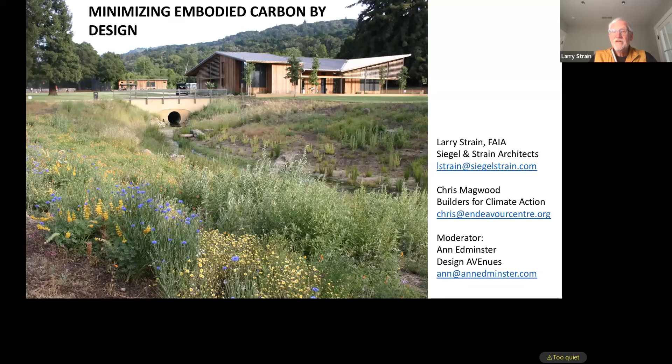So this is kind of what the day is going to look like: what it is, why it's important, embodied emissions from buildings, and the time value of carbon emissions, reducing embodied carbon using standard materials and methods, which is a case study that I'll be sharing. Then Chris has got a whole pre-recorded segment on carbon storing and carbon sequestering materials. After that, I'm going to close by talking about the importance of existing buildings in this whole discussion about embodied carbon and a little bit on tools that are available.

Starting with definitions: first of all, when we talk about carbon in this slideshow, we're talking about all greenhouse gases. We probably already know that, but it's all the methane, carbon, CO2, everything. It's all just a shorthand for talking about that.

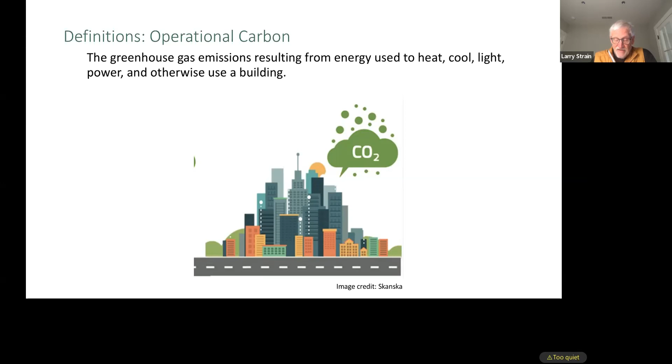Operating emissions are all the greenhouse gas emissions from operating a building, and it includes direct emissions from on-site fossil fuel combustion at the building and indirect emissions from the electricity used to power the buildings. These emissions are ongoing and cumulative over time.

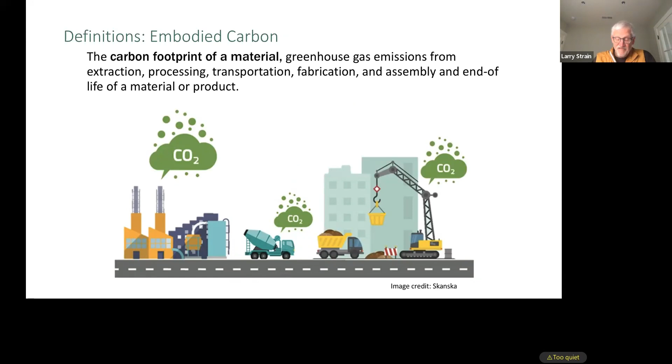Embodied emissions are the carbon footprint of a material, the greenhouse gas from extracting, processing, and transporting it. It typically represents a huge hit of carbon emissions at the beginning of a building's life, but it also includes emissions from maintenance and repairs over time. Embodied carbon doesn't have to be emissions, it could also be stored or sequestered.

Avoided carbon, which we'll talk about too, is about the savings from a particular choice. For instance, renovating and upgrading a building compared to tearing it down and rebuilding it, or building with carbon sequestering materials compared to building with materials that generate carbon emissions.

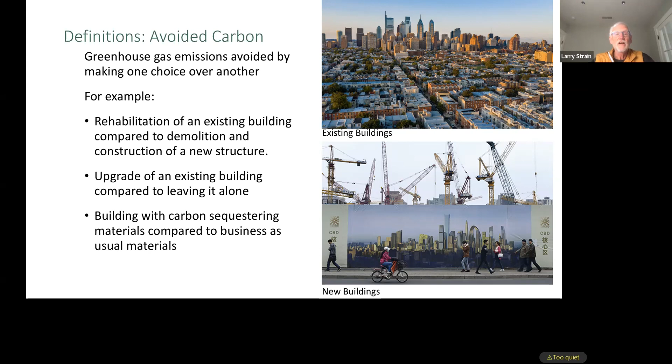You've probably seen this chart before, many of you have. Buildings make up about 40% of global emissions. 28% is from operating all the buildings we already have, and 11% is the embodied emissions from buildings. The point I like to make is that operations is mostly existing, embodied emissions are mostly new, although it does include renovations of existing buildings, but most of the emissions are coming from building new buildings.

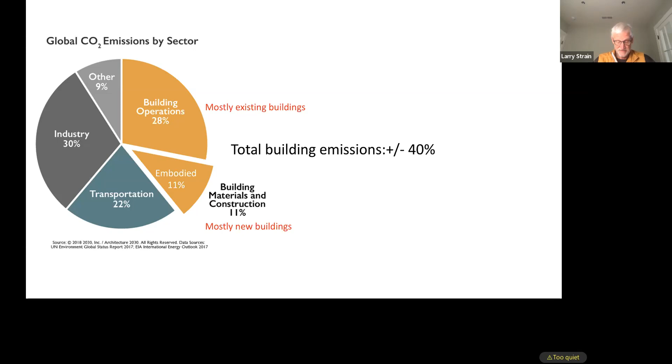The majority of embodied emissions happen when the building is built. What this means is for the buildings we build between now and 2030, if we continue to build the way we currently build, about 80% of their carbon footprint will be embodied. So for new buildings, over the next critical 10 years, reducing embodied emissions is key. To tackle operating emissions, we need to make new buildings net zero, but even more importantly, we need to reduce the operating emissions from existing buildings, and we'll get to that later.

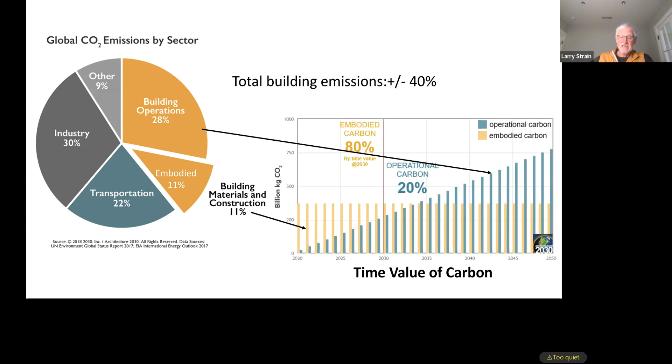The majority of embodied emissions typically are from the materials we build with. They make up 70 to 85%. The rest are emissions directly associated with construction, the site work and utilities required for the project. Many embodied carbon studies leave out these other emissions, and many aren't even counting all the materials. Some only include structural materials. These percentages will vary by project. Sometimes site work or transport can be significant, but the bottom line is most embodied emissions are currently from the materials we build with.

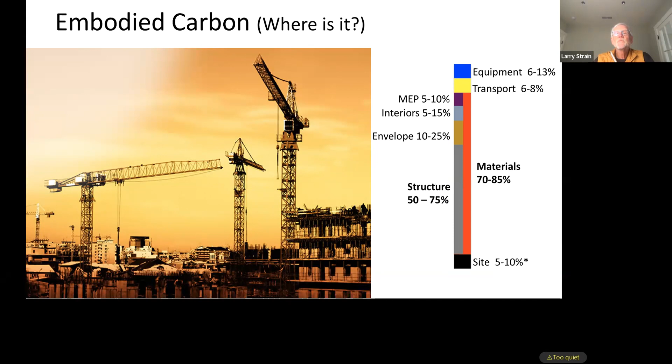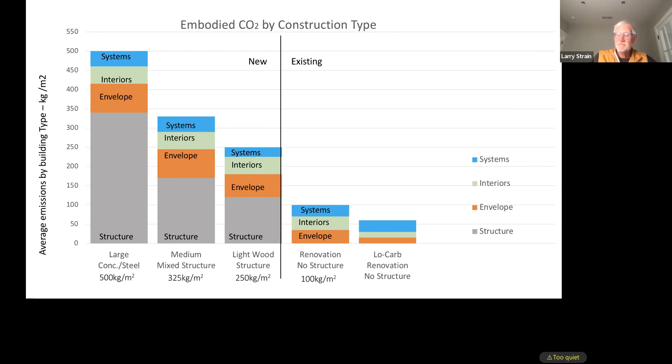So our firm knew about the importance of embodied carbon since, as Anne mentioned, the early 90s. But at first we just focused on reducing the carbon footprint of concrete because we knew how important it was. We didn't know much about the embodied emissions from all the rest of the materials. The first project we tried this on was the Portola Valley Town Center, a LEED Platinum, really efficient project built with a conscious effort to use low impact, low carbon materials.

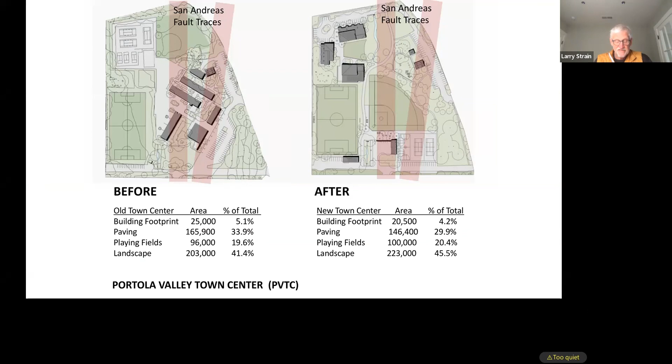The existing buildings on the left were deconstructed and the materials were reused in a new town center just outside the fault zone. We were also able to reduce the building footprint and paved areas and increase the landscape and playing fields. We had a very involved community and a lot of input from the community on the project throughout, which was really helpful.

Restoration was an important part of the project. We introduced a lot of native planting and habitat. This is a portion of the creek that we uncovered, and it forms the fourth side of the town green. The community hall is in the background.

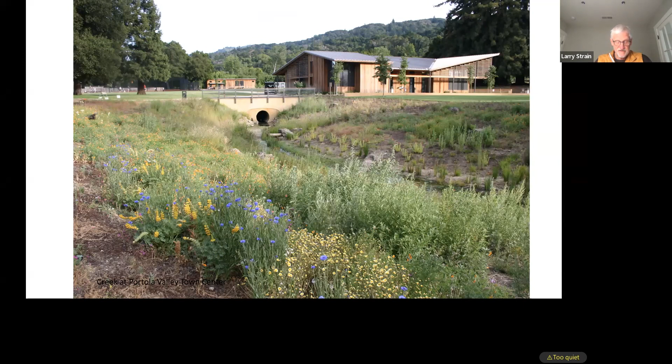After it was completed, we decided to try and measure all of the carbon emissions from building the project, the embodied CO2. This was before there were tools like Tally available, so the first thing you had to do to calculate the carbon footprint was figure out how much everything weighed.

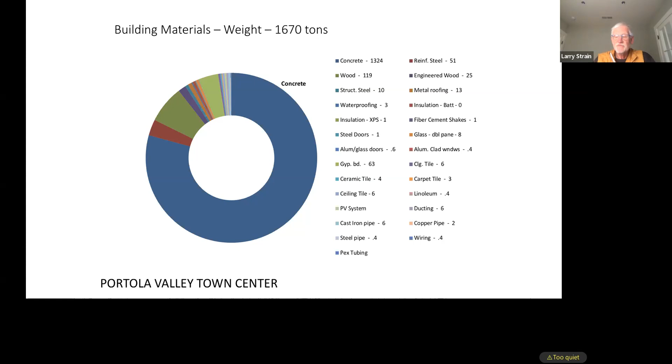You can see that the concrete foundations and slabs accounted for most of the weight, about 80% of the weight of these buildings was concrete. This is even though these were wood frame buildings, clad in wood, with wood paneling, wood ceilings, and some wood flooring.

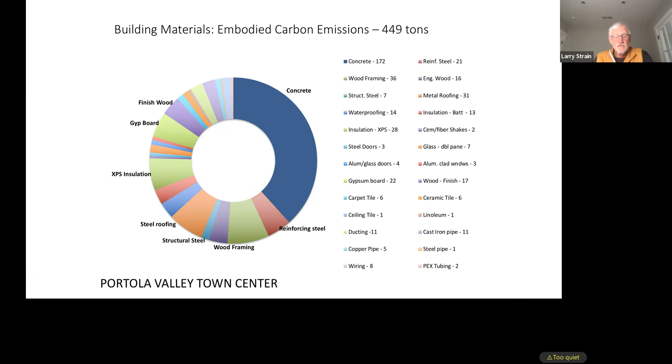Wood was about 12%, steel a little over 13%, even though by weight we used half as much steel as we did wood. The new framing lumber was all FSC certified, and most of the rest of it was reclaimed. We didn't count sequestration for the new lumber, which would have lowered our wood number significantly.

So then we modeled a base case project using standard material choices, which are the orange bars on this chart, and compared it to the materials we actually used, which are the blue bars. Concrete not only accounted for the largest portion of emissions, on the far left there,

it was also where we realized the largest savings, about an 80-ton reduction from using a high slag, high fly ash concrete mix. The other interesting thing we learned was that we saved about 40 tons by using the salvaged wood.

It shows up here as a negative number on this chart because, A, the salvaged wood is not going to landfill and decomposing and turning into methane, and B, because the trees we didn't have to cut down are still growing, sequestering carbon. The overall reduction was a little over 30%.

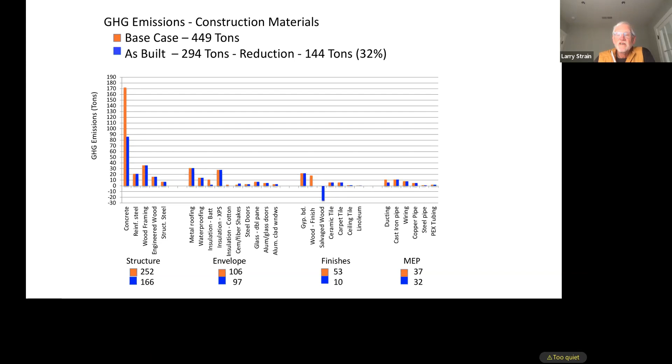And this was really mostly from those two sources, from concrete and reclaimed wood. There are other ones where we saved a little bit here and there, but you can see down at the bottom, the reductions in each category, and the largest one is in structure. But finishes, which includes the wood, was also pretty large.

This is the multi-purpose room in the community hall and the reading room in the library. Almost all the wood was salvaged from the old school buildings, remilled and used on the ceilings and walls. The floor in the multi-purpose room is eucalyptus from trees that were cleared for fire safety reasons and milled and dried within a few miles of the site.

Everybody got on board with the salvaged wood. The town, because it recalled the old school buildings, which they had loved, and the contractor also really got into it. When he realized we were running out of salvaged wood from the old school, he took the wood crates that the metal roofing came in and remilled it and used it for window trim without even asking us. He just went ahead and did it, which we thought was great.

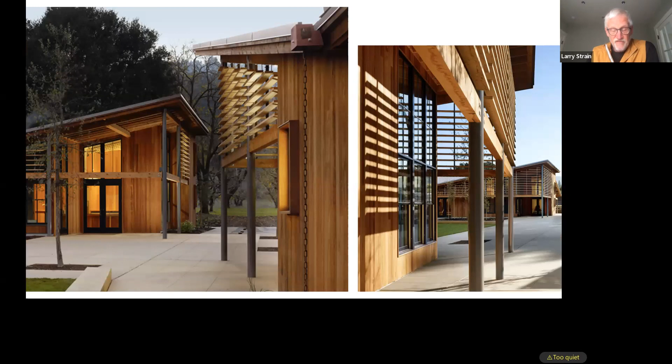All of the exterior siding is salvaged redwood from Northern California, a nod to the many tall redwoods growing on the site. The sunshades are salvaged yellow cedar, chosen because it weathers to a silvery gray, which better bounces light into the buildings. The beams supporting the sunshades were also salvaged from the old school buildings.

So, how do the embodied emissions compare with the operating emissions for this project? As usual, for operating, we started with a passive approach: maximize natural ventilation and daylighting, minimize heat gain with shading, use thermal mass for nighttime cooling, and we modeled all this with our engineers to optimize our choices.

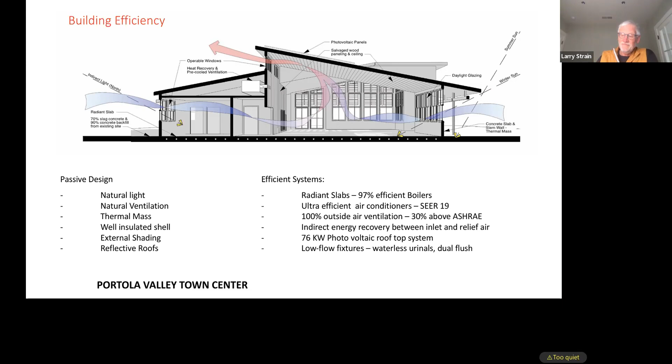After we had done all that, we were in the position to use small, very efficient mechanical systems, which saved both first cost and operating costs. The buildings use about half as much energy as a building designed to California Title 24, and most of that was supplied by on-site PVs.

Embodied carbon, embodied CO2, is usually counted as so many years worth of operating CO2. And over the projected 100-year lifespan of these buildings, even accounting for increases due to repairs and maintenance, the embodied emissions for the as-built project were about 13% of the projected operating emissions, which wasn't very significant.

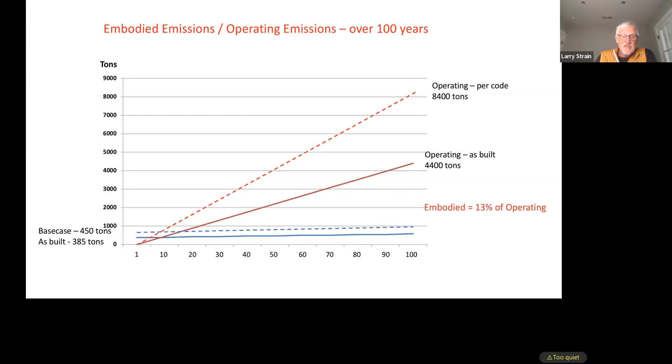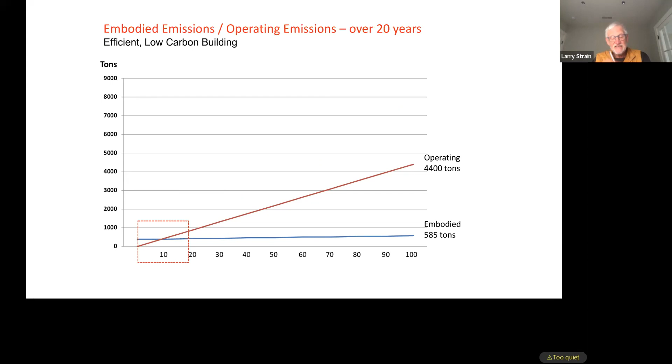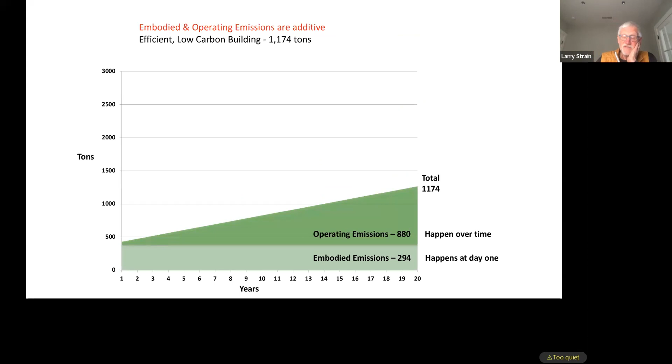There are also ways to reduce embodied carbon even more, which Chris is going to talk about. And now, I hope, through the wonders of technology, we're going to hear from a pre-recorded Chris to tell us about more radical ways of approaching embodied carbon emissions.

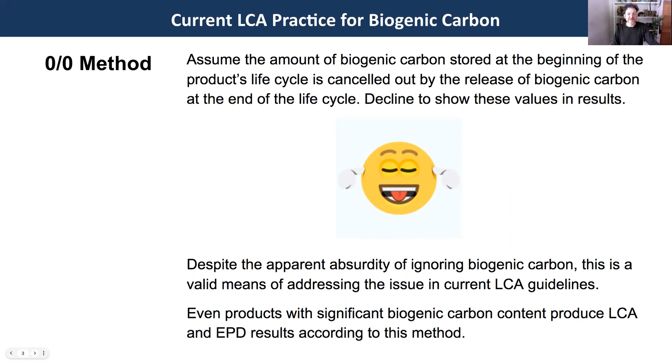The -1+1 method is somewhat similar in that you count the carbon that was pulled out of the atmosphere and is stored in the material at the front. So in the A1 harvesting section of an LCA, you say if there's 20 kilograms of carbon stored in this material that came out of the atmosphere, there's a -20, like 20 came out of the atmosphere. Then at the end of the life cycle, you say that 20 came back out here.

Or you can say, well, not all of that 20 came out at the end. We're going to say that X amount of the material goes to landfill, and therefore this much carbon comes out, or this much gets incinerated, and so this much carbon comes out. Essentially, you're using the minus and the plus to come up with a figure for the end of life, and it usually ends up being a positive number, showing that the material still has sometimes a significant carbon footprint, even though it has this large amount of carbon stored in it.

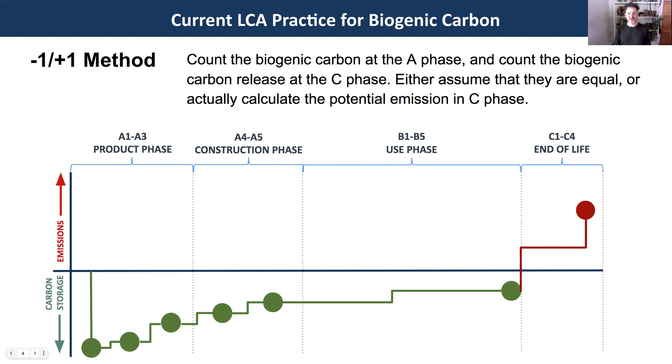This seems like it should be a good way to do this, but it highlights a really critical issue with LCA practice as it's done right now, which is that it ignores the importance of time in thinking about emissions and carbon storage.

We tend to fixate on the final number for a material when we're looking at LCA. We add up all the minuses and all the positives, and we get to this number at the end of life that's the total of all of those things. That single factor tends to be what we use for making comparisons between materials.

So if we use the -1+1 method but only pay attention to the end result, we miss a whole lot. Here's a map of a biogenic material: there's a big drawdown in the A stage when the material is growing, when those plants are photosynthesizing CO2 out of the atmosphere. Then that green line rises as it's harvested, transported, produced, built, maintained, fixed, and then finally the building is taken down or the material is taken out and something happens to it at the end of its life. So there's your trace of a -1+1 accounting for a biogenic material.

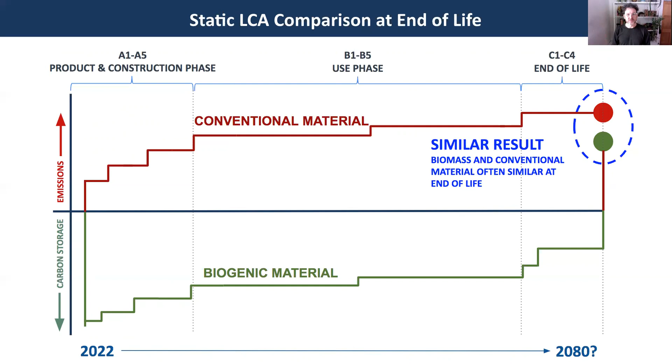What happens if we're fixated on that end-of-life result only is that those two materials don't look very different. You go, oh, the biogenic material is this percent or that percent less impactful than the conventional one, but it's not so much. So if it costs more, or if there's any other impediment to using it, it often just gets written out of the design because it's not making that big a difference. So what we need to be thinking about in life cycle assessment is the dynamics of time, and what it means to think about emissions as they occur and what happens when they occur.

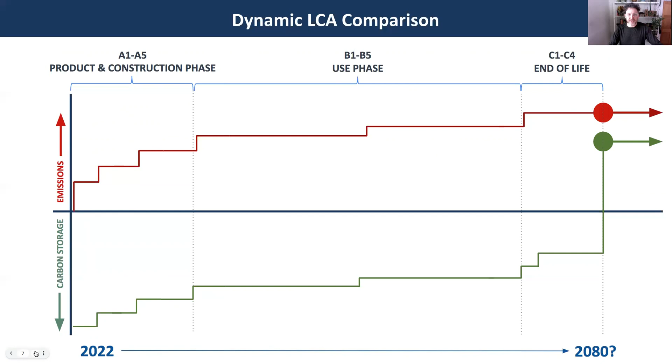When you take carbon out of the atmosphere and put it into a building material that lasts a reasonably long time, measured in decades or hopefully a century or two, it's not the little green dot at the end that tells us the impact that material has had on the atmosphere and climate. It's the area under that zero line.

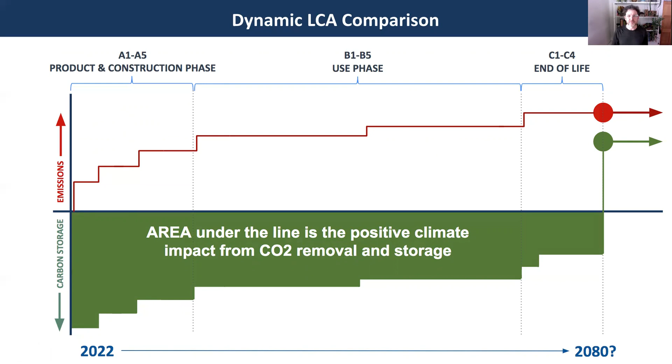Alternatively, we have to think about the area above the line as the warming impact from emissions of a material with net emissions. Again, it's not just the number at the end acting like a running total—it's the area. Every time this line jumps, those emissions enter the atmosphere and stay there, continuing to drive climate change and make the planet warmer.

It's not like emissions happen and go away—they happen and accumulate. This initial burst of emissions is still in the atmosphere. There's some decline over a century or two, but it stays in the atmosphere and drives warming. So it's that area above the line that represents the ongoing climate warming impact from those emissions.

If you add up the area below the line and the area above it, you get a very different picture of the climate impact of two material choices, rather than just looking at the final result of an end-of-life stage LCA. I think people in the LCA world are realizing we don't fix the climate by fixating on a single number representing a material at 60, 80, or 100 years. When emissions enter the atmosphere, or carbon comes out of it, there's an immediate impact that traces over time.

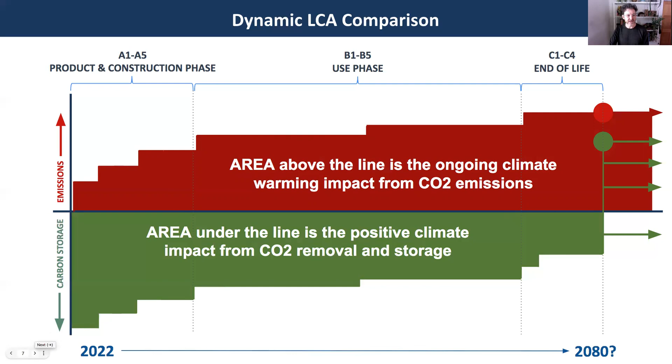But I think there's a reasonably good chance we'll do better with these materials. If we're reusing a lot of the carbon in biogenic material from a building, or turning it into biochar, carbon storage could actually continue for a longer period—possibly indefinitely. That's another thing to consider when looking at LCA results.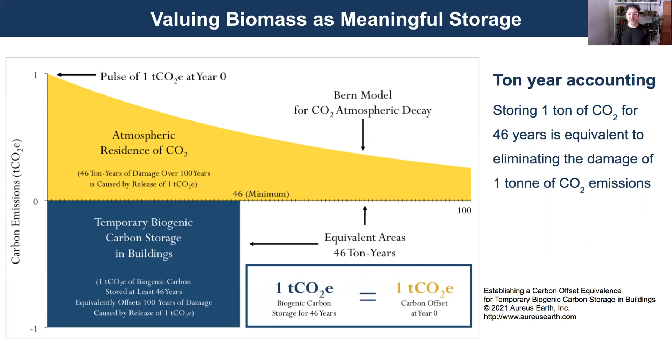If we can keep the carbon in the building longer than 46 years, it's doing more work than just 1 ton, and I'll show you that on the next slide. What we're trying to point out is that climate science understands the value of time. LCA practice hasn't necessarily understood the value of time, but if we were thinking about time the way climate scientists think about time and carbon storage, then putting carbon in buildings for 50-odd years is really meaningful - it's a 100% offset of the same amount of carbon that you've stored.

So you can come up with figures to scale the value of carbon storage based on this. If you store 100 tons of carbon in a building for just 1 year, it's the equivalent of 2.17 tons of carbon offset, and so on - you can multiply it out. At the 46-year time window, storing 100 tons offsets 100 tons. But if it goes longer, say to 80 years, your 100 tons of carbon storage has actually done the work of offsetting 174 tons, et cetera.

As the time increases - the time you've kept that CO2 out of the atmosphere - the positive impact increases as well. What this also means is that when the carbon comes out of a building, if it comes out after the 46-50 year window, whatever gets emitted is essentially a new emission. It's not a continuation of the old emission - it did its work, it completely offset a ton of carbon, and whatever portion comes out, you could consider it a new emission and deal with it separately, because it's negated itself by being out of commission for those 46 years.

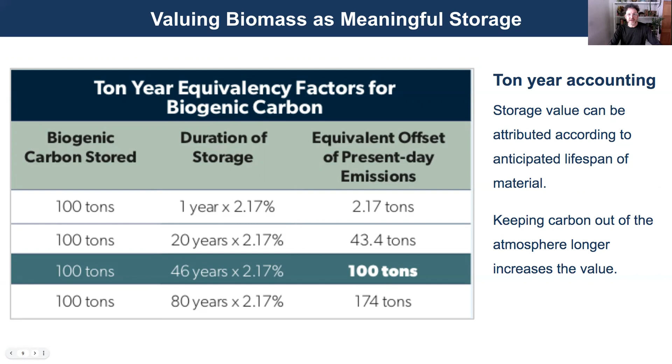So I hope that's a good enough framing that we can start to think about why biomass, why biogenic building materials have this value that perhaps hasn't been well understood or applied in building and LCA practice. Now, forests and timber products are way more difficult to assess this way, because right now the way we account for timber products and the emissions and carbon they store is looking through a pretty narrow window, and it may not be capturing everything that's critical to understand.

Looking at current LCA practice, right now for timber products, the rules are that if your wood product is coming from a sustainably managed forest - and the ISO standard says FSC or SFI in North America are considered examples of that - then you can count your carbon in the -1 +1 sort of way.

Now, what's weird about that is that neither the Forest Stewardship Council nor the Sustainable Forestry Initiative, nor to the best of my knowledge any forestry program, actually tracks carbon as part of the certification. So we're applying this notion that well, they must be doing a pretty good job, so we'll just credit them for doing a good job for something that they're not really doing on the wood side.

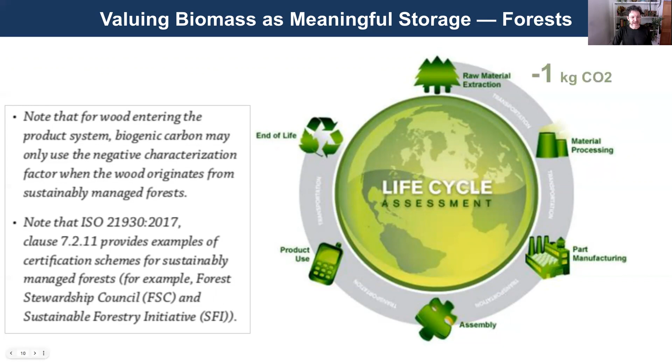Wood is really tricky because there's a lot missing when you think about analyzing wood in this way.

When you do the life cycle assessment of a timber product, a bunch of things don't show up. One is that around half of the biomass of the tree doesn't become a carbon-storing timber product. If I cut down a tree to make 2x4s, about half of the volume becomes a 2x4. The other half becomes sawdust, forest slash, or something burned by the mill to heat the kilns to dry the 2x4s. But a good half of that tree's carbon goes back to the atmosphere almost instantly.

So we're saying, okay, you've got say a ton of carbon stored in the 2x4s in your house, but a ton of carbon went into the atmosphere to get that ton of carbon into your building. So is there any climate value there? The answer is probably no, but that's not captured in current LCA.

Also not captured is the volume of root mass. Typically about 20% of tree biomass is in the roots, and we don't use that at all in timber. That material ends up rotting and going back to the atmosphere fairly quickly. So there's another chunk we're not accounting for.

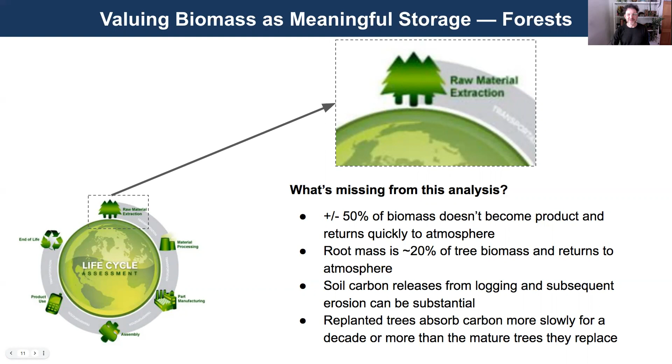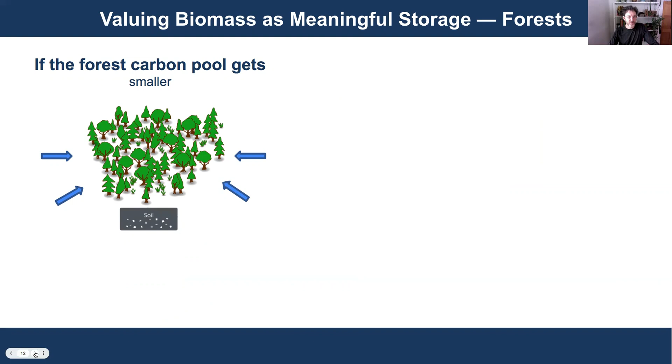The way I guess to best summarize it is to say we're not going to do anything if we're making the pool of carbon in our global forests smaller—in the trees, in the soil, in the supporting biomass that's in a mature forest. If we're making that smaller while we're making the pool of wooden, timber buildings bigger, we're not doing anything for the climate. In fact, there's a good chance we're doing something worse for the climate.

So the only way we can say 'hey, this big timber building I just made has meaningful carbon storage' is if we made the building and made the forest carbon stocks bigger at the same time. There are people who will argue that we can't do that, and people who will argue that we can. I don't know enough about forestry to know who's more right.

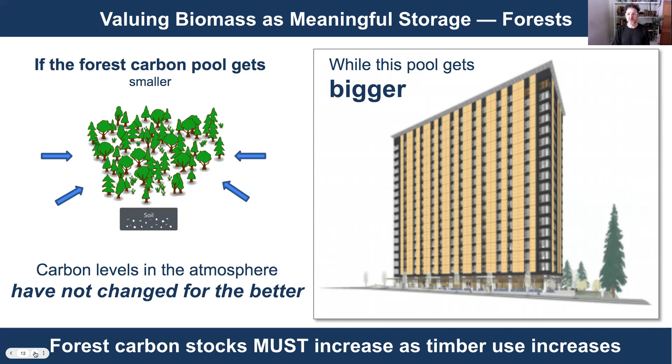But I do know that this notion that timber buildings are going to save us because we can store tons of carbon in our buildings by using timber is not necessarily going to be the case. Currently, our forest practices do make this pool smaller while they make the building pool bigger. And so there's no climate benefit to pursuing that strategy.

So you might be saying, okay, you just told me all this stuff about the climate and meaningful carbon storage, and then you just told me forest products aren't that. So what are you talking about?

What I'm talking about is all the other kinds of biomass that are out there that we could be putting into buildings, and that some people are putting into buildings. My overall argument is that this is the stuff we need to start getting into buildings - billions and billions of tons of biomass that is fast growing, often annually renewing, and often generated as a waste product or byproduct of other industries, in particular agriculture, but also to some degree forestry, and also from our waste streams.

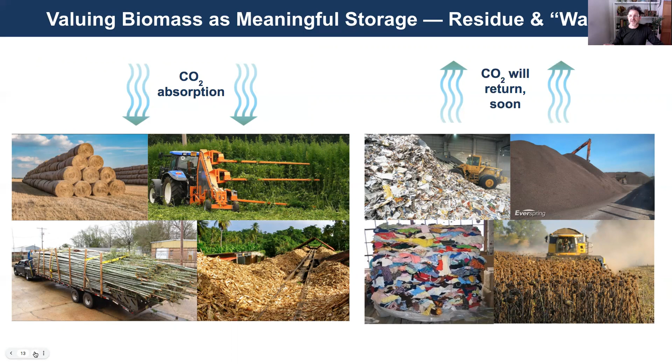So in some fashion or another, all of this biomass pulls CO2 out of the atmosphere, but then it goes back very quickly, whether that's by burning crop stubble, or turning trees into newspaper and incinerating that, or turning cotton into textiles and then burying them in landfills. Whatever it happens to be, we have this cycle of generating tons of residue biomass and then letting the carbon it's captured go back to the atmosphere.

The thinking that I have about buildings, and that a growing number of people have, is that buildings are an ideal way to interrupt that flow. The CO2 that we're putting in buildings could end up back in the atmosphere, but if we're going to interrupt that cycle, if those plants are going to draw billions of tons out of the atmosphere for us, we can put them into buildings and hold them there.

By ton-year accounting that's 46 years, but let's be more ambitious about the lifespans of our buildings - say 100 years, 200 years - and interrupt that cycle. Then if the carbon goes back to the atmosphere, it's a new emission later on, and it's done the significant thing we need to do right now of reducing the amount of CO2 in the atmosphere today, tomorrow, and over the next few decades.

So there are all kinds of buildings with all kinds of different building materials that are using this kind of residue and waste biomass. That's what I'm going to focus on, and what I hope you leave today interested in focusing on as well.

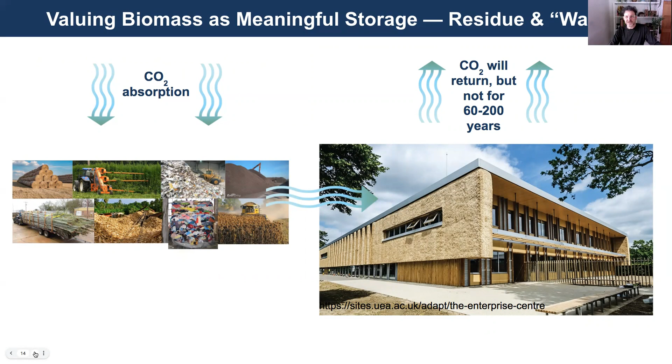So how much of this biomass is there? Lots is the answer. Here's a study in the US.

This got studied really well in the 1990s when initial thoughts about what to do about CO2 and the climate looked at biomass as a replacement for thermal energy generation. We were basically saying we've got to stop burning fossil fuels, but if we burn biomass instead, we'll offset all that fossil fuel use. Luckily, that thinking is shifting - we're realizing that just continuing to burn stuff might not be a great thing.

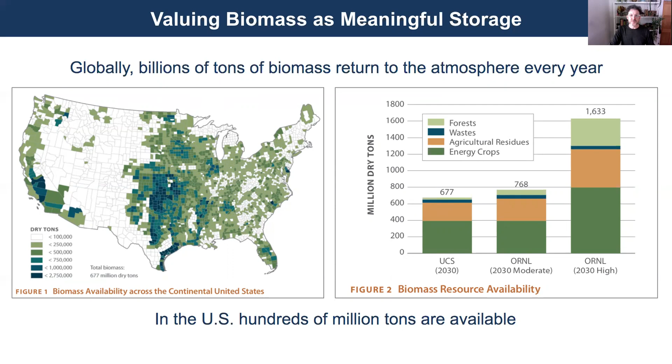And this kind of figure plays out around the world too, without having to involve ourselves in massive land use change or cutting down forests. We have literally millions and billions of tons of biomass that could be available for making things like building materials, where that carbon gets stored durably.

So let's take, for example, a favorite material of mine, which is grain straw. There are all kinds of people making all kinds of interesting building products and buildings out of grain straw. But just to give you a sense of scale, over 2 billion tons of grain straw are grown every year to give us the wheat, the oats, the barley, the rye, the rice. We eat the grains that these things grow, and they all leave a stalk that we don't eat and nobody eats, and is either burned or drowned or in some way gets back into the atmosphere very quickly. So we're already planting, we're already growing, and we're literally already collecting over 2 billion tons of grain straw.

That 2 billion tons of grain straw contains 4 billion tons of carbon dioxide that was drawn out of the atmosphere to grow those plants. If we could capture that and put it in, say, buildings, that would be drawing down the equivalent of India's GHGs annually for material that's already growing and material that's already being planted, material we already have access to, and material we already know how to make materials and buildings out of.

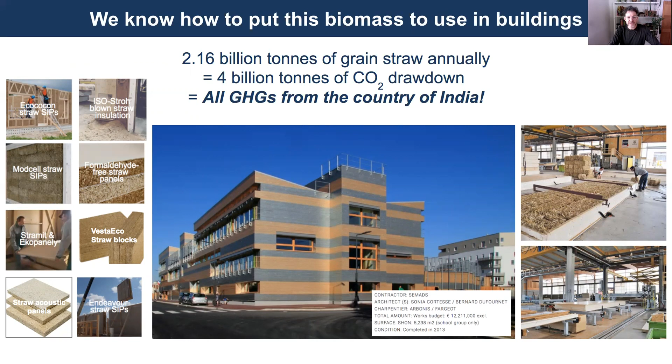There's people making straw SIP panels, there's people making blown insulation out of straw, there's people making compressed interior partition wall panels, insulation blocks, acoustic panels, all kinds of things. And also people making now quite large buildings, 5,000 square meter plus public buildings. Here are the straw bale panels being made for this school in France, for example. So this isn't sci-fi, this isn't sort of futuristic, this isn't, you know, wouldn't it be nice if - this is something that people are already doing. And if we put our minds to it, it's not a big technical leap to figure out how to do this.

So I've been doing a lot of work at the residential building scale. That's kind of my focus. And in the last couple of years, I've run over 700 sample homes, kind of as-built homes from around North America through calculations. And to date, the average is somewhere between 200 and 250 kilograms of emissions per square meter of floor area for a low-rise residential building. So 241 was the average when I made this graphic.

So there it is. There's a typical scenario of our small buildings. At the rate that we're building those small buildings right now, that's 54 million tons of emissions a year. That's emissions that would come from 15 coal-fired power plants, and we're adding that to the atmosphere annually while making the materials to make just our low-rise residential buildings in the US.

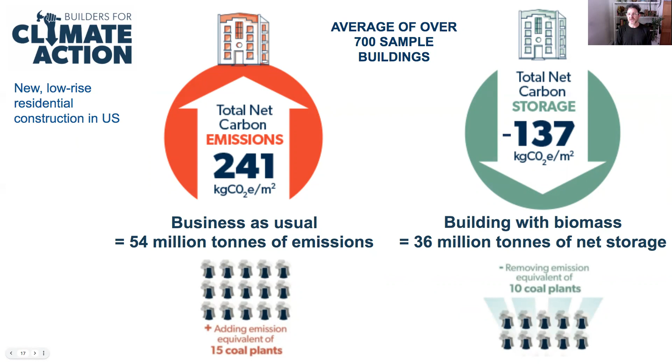On the flip side, if we did the kinds of swaps that we know are possible, and we know they're possible because we can see example buildings like them - I'll show you a couple in a minute - we can get that figure to somewhere in the neighborhood of 130, 140 kilograms of net storage because of all these biogenic materials per square meter of building. If we can get from where we are now to there, we would be net storing 36 million tons of CO2 annually by making our residential buildings.

So we can go from adding 15 coal plants worth of emissions to removing 10. That's the difference of 25 coal-fired power plants if we can get from this place to that place, which is a huge intervention in terms of the impact on the climate. The single biggest climate impact in my country has been when the province of Ontario shut down 4 coal-fired power plants, which absolutely changed the country's GHG emissions. And that's just 4 plants. We're talking the potential for just in the US of changing it by the equivalent of 25 coal plants. So if you look at it on a one building by one building basis, it's like, does this really make a difference? But yes, it does when we look at it at the scale that we are currently building.

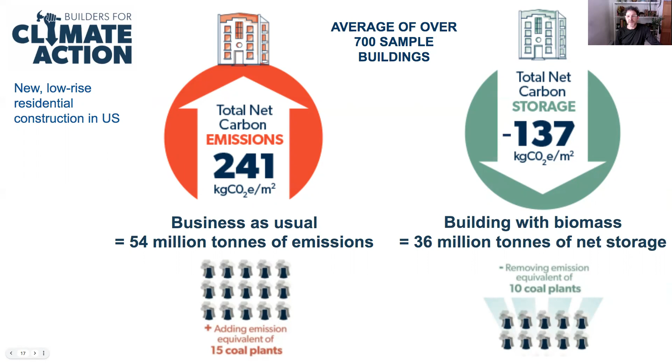And here in North America, we're building a lot less than in other parts of the world. This comparison gets exaggerated if you start looking at developing countries - if you start looking at India, if you start looking at the building stats for China, or what's predicted for Africa, this gets way more intense and exaggerated. So either it gets more intense and exaggerated on the emission side, or we work hard to intervene and make it even more dramatic on the storage side.

So I'm just going to quickly show you some examples of larger buildings. I know, because my own practice, my own focus is in low-rise buildings, that quite often people get the sense like, oh, that's sweet and cute, you can do this with little buildings, but you can't necessarily do it with big buildings. So I'm just going to show you some examples. They're all from Europe, of places that are taking these notions, taking these types of materials and making large buildings out of them.

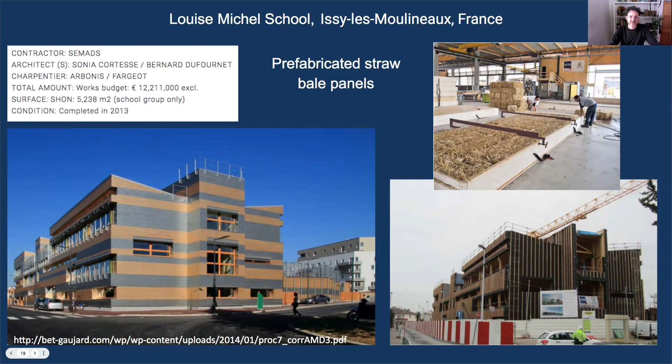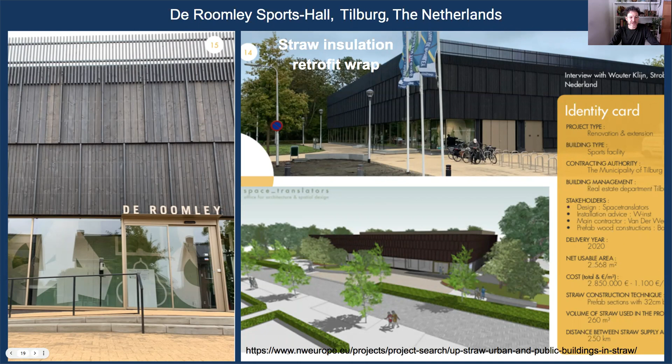So here's the school in France that I showed you a couple slides back. This one is really great. This is a major insulation retrofit of a community center, sports center in the Netherlands, using compressed straw, chopped straw, blown in to be the insulation for this really large 2,500 square meter retrofit.

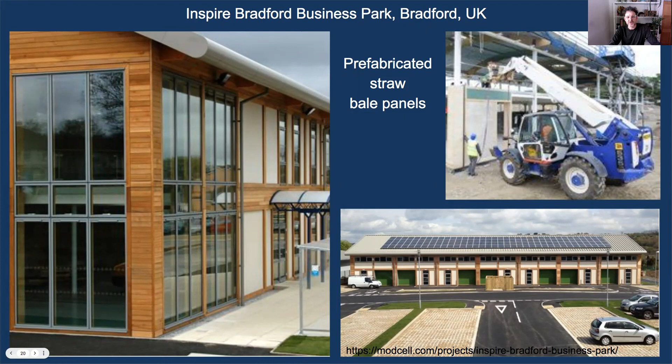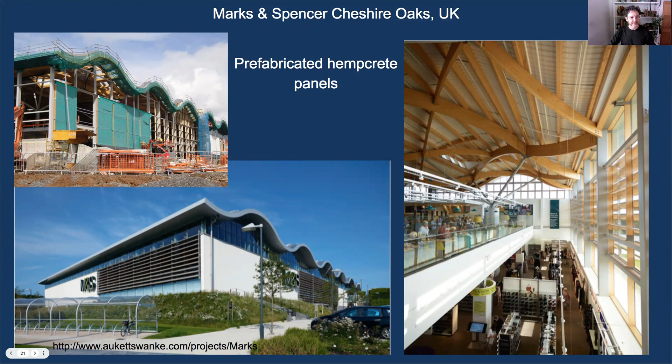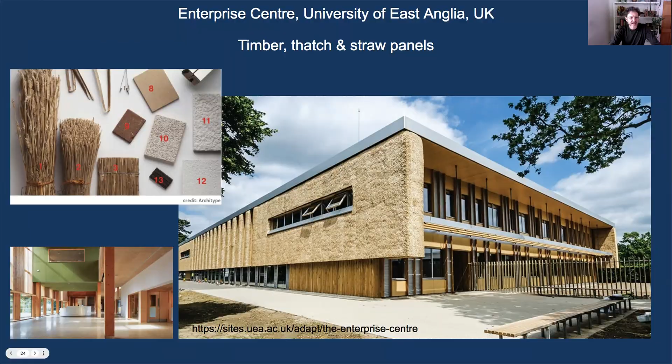And now this is a building that's smaller in scale, but this is one that I can talk about a little bit more in depth because I was really involved in this building. This one is a new classroom at Trent University in the city of Peterborough, Ontario, where I'm from. And they needed a new forensic crime scene building for their forensics department. So they were really interested in making this a net zero building.

They were initially interested in making it a net zero emissions building on the operations side, which I'm obviously a huge fan of - that's what we need to be doing. And they were doing it through the ILFI's Zero Carbon Buildings Certification Program. But when they asked for our involvement, I said, well sure, we can make a net zero emissions building, but how about we also try to make the materials net zero emissions as well. And so they were interested and joined the design team.

So we suggested a number of material substitutions to get there. One being using foam glass gravel for the insulation under the slab. You can see in this photo here, this is made from the recycled glass that nobody knows what to do with, that we have mountains of all over the world. It sort of puffs it into a foam glass that is both structural and insulative. So it replaces the gravel you would usually put under a building's slab, but also often the foam insulation that would go there. It's not a carbon storing material, but it has a very small carbon footprint, especially compared to foam insulations.

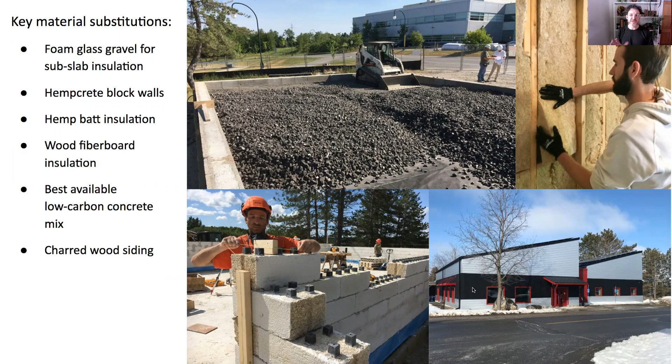So not that many changes to the overall building plan, but you can see they already had a base case building set up because they were going to build this differently. So when we calculated the footprint of the materials for their base case building, this building was going to have over 211 tons of emissions associated with making the materials. It was going to be concrete block and spray foam as the main structural materials for the walls. It was going to have a metal framed roof and either spray foam or mineral wool in the ceilings. So anyway, all of that added up was 211 tons.

As built with the low carbon materials and the carbon storing materials that we applied, we got that down to 25 tons. So that's an 88% reduction. And then we also calculated what if we were accounting for the carbon storage value of the timber we used in here, because we did go out of our way to try to find as much locally sourced, really sustainably harvested, locally milled wood. So again, we don't know for certain that we're doing the right thing, so we aren't counting on these numbers, but just to show, if we're doing wood right, then we can actually get this building down into net carbon storing territory, just slightly.

So, dropping the carbon footprint of these materials by almost 90% is pretty major. And so now when we say, hey, this is a zero carbon building, what we're talking about is zero carbon operationally. So it's all electric. The grid in this part of the world is pretty clean to start with, and all of its grid use is being offset by the solar panels on the roof.

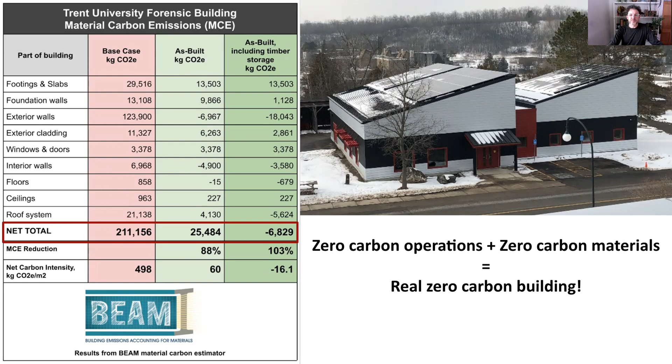And we can't just say, let's just focus on the operations. If every small building like this is responsible for 200 plus tons of emissions while it's being made, it really doesn't matter so much how good the operating emissions are. You've already blown your carbon budget before you've even started operating the building. So we're trying to think about these things together and make sure that when we say this is a zero carbon building, that we're actually talking about a zero carbon building.

So another project I'll show you just to wrap up. We built this with our students in 2017. We called it Zero House because we were really intentionally setting out to have a zero carbon footprint building, both operationally and on the materials side, as well as including zero toxins in the materials and having the building responsible for zero waste as well.

So we built one unit of what the design team had figured as a sort of stackable row house. This was a group at Ryerson University making a proposal for the end of a city block in downtown Toronto. And so we were looking for a project to do. We thought we could give them an example of how this could work, not just in a prefab and energy efficient way, which were their goals, but in bringing this notion of carbon storage to the table as well.

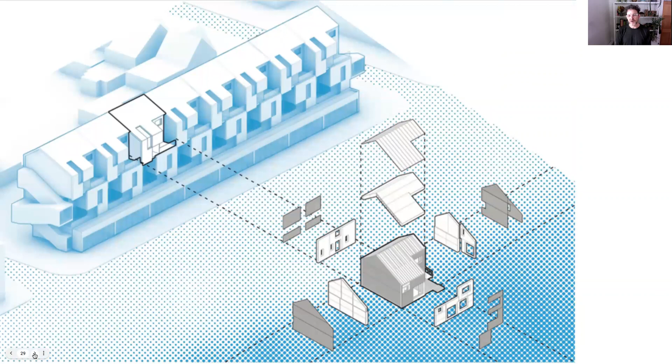So we essentially made the building off-site. We really wanted to not just make a prefab building, we wanted to make a prefab building that you could put together and take apart, and put together and take apart. And in doing so, earlier on I was saying, if we can extend the lifespan of this carbon in buildings beyond the lifespan of one building, then we extend the value of storing that carbon. We were seeing a lot of people doing interesting things with prefab, but nobody was planning on making their prefab buildings to take down again.

And we really wanted to go about it that way. So to challenge ourselves, we decided to make the panels, assemble the building in our hometown of Peterborough, let people see it, take it down, put it up at a design show in Toronto, Ontario, let people see it, take it down, and then sell it to a client and put it up on their property.

So in our little flying factory, we built floor panels, wall panels, and roof panels, mostly with wood framing and using different types of carbon storing insulation. A lot of the wall panels had straw bales in them. Others had cellulose insulation. They all had ReWall, which is a recycled drinking box, juice box, wall board, and wood fiber board sheathing, which is like a structural exterior insulated sheathing. So the panels were kind of loaded with waste biomass carbon storage.

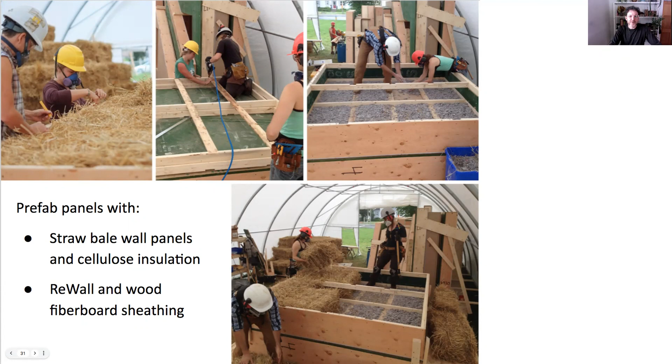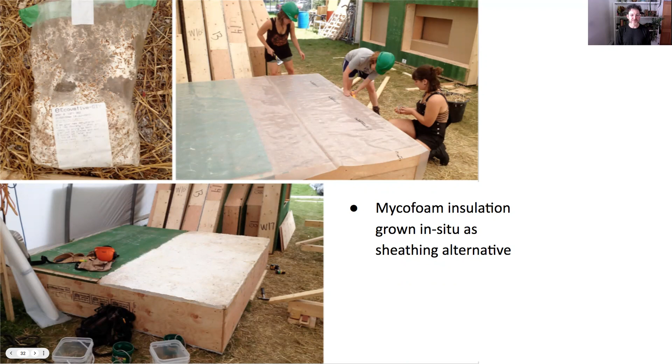We did a few experimental things like sheathing some of the panels with mycofoam, which is a mycelium-based insulation that we grew in situ on several of the panels, just to give that a try. Worked really well. That's a material I'm really excited about in terms of being able to make building materials that get us completely outside of the notion of going out into nature and harvesting things, then shaping them and turning them into products, and instead looking at how we can actually grow the materials we need. It was really exciting to pull the cover off of these panels 4 or 5 days after we inoculated them and see that we had this incredible fireproof, highly thermally resistant, moisture resistant insulation that grew all on its own.

So we put the panels up. They're going up for the second time. It's really quick—we can assemble the entire structure, floor, walls, and roof in a day.

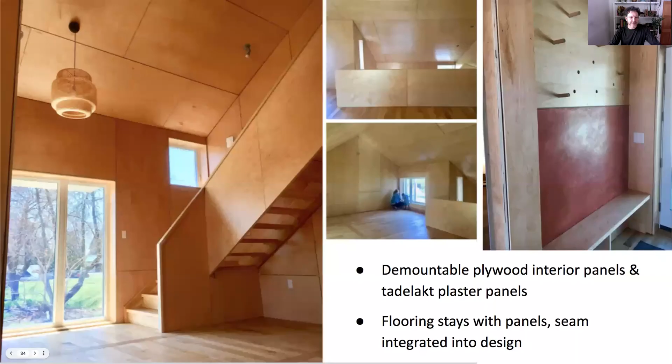We also wanted to make sure we were thinking not only about the structure being removable, going up and down, but also the interior and exterior finishes. So on the interior, we used a lot of pre-finished plywood with attractive surface-mounted screws so that everything could go up but also come down at any point. If somebody wants to rewire or make alterations, it's easy to pull off whichever pieces of plywood you need to get back into the service cavity.

We did some demountable plaster walls as well. On the right you can see a sort of shiny red tadelakt plaster—that was in the hallways and in the bathroom.

The flooring traveled with the panels, and you can see there's a piece of hardwood flooring running the opposite way—that's the seams, and that's how we handled that. So in all facets of the building, we really tried to figure out how to make sure all the materials are reusable and can be taken down and put back up again.

On the exterior, that meant we used steel cladding, which from a carbon footprint point of view was definitely a penalty to the overall carbon footprint, but it made a lot of sense in terms of being able to mount and dismount an exterior finish repeatedly.

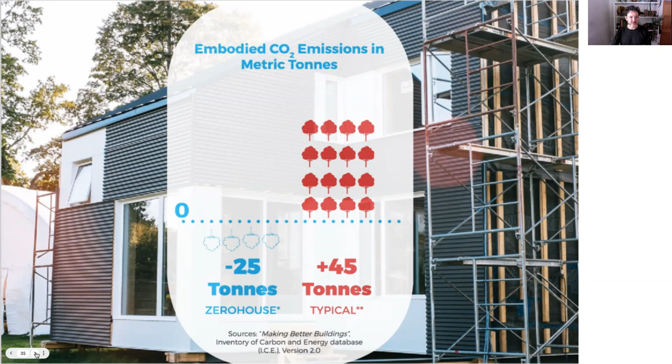So I'm going to wrap up by inviting you to be bold and radical in your approach to the built environment and its carbon footprint. I hope I've shown you enough examples of buildings at all kinds of scales that people dedicated to building this way, doing these kinds of calculations, taking the notion of biomass buildings seriously, are making serious buildings and doing it really well—and it's potentially transformative for the entire practice of architecture and for the global climate.

I'm sure somewhere along the line you've seen the impact buildings have globally on our climate, and what I'd like us to think about is not just chipping away at that by incrementally reducing—I want to see us flip that paradigm completely. And I'd like to invite you to be part of doing that.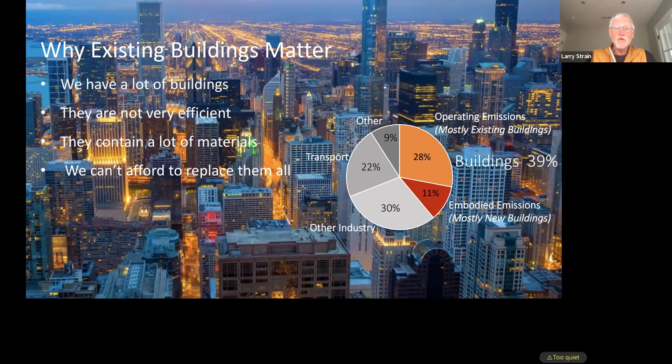The easiest way to use fewer materials is to reuse the buildings and materials we already have. The built environment is not just a potential carbon sink, it's a huge carbon bank. Reusing buildings, including renovating and upgrading them, results in about 50 to 75% less embodied emissions than building a new one, and makes it possible to build fewer new ones. The other huge benefit from reusing buildings is that if you make them more efficient and all electric, you can reduce and eliminate operating emissions from all our existing buildings, which account for the majority of emissions from buildings.

Here's how emissions break down for new and existing buildings. I'll preface this by saying this is for the US, and we build a lot less in the US than in a lot of the rest of the world that's rapidly developing, so this embodied bar in the center would go up a lot for the global picture. In the US, we built about 4 billion square feet, 2/3 residential and 1/3 commercial, in 2018. The emissions from operating that 4 billion square feet is somewhere between 10 and 20 million tons a year, depending on how efficient they are.

The emissions to build that is about 150 million metric tons. But the emissions from operating the 340 billion square feet of buildings we already have is just under 2 billion tons. So for new buildings, as Chris has said, we really need to focus on eliminating embodied emissions. For existing buildings, we need to work on eliminating operating emissions. Reusing and upgrading buildings addresses both of these. Reusing buildings makes it possible to build fewer new ones, which brings down embodied emissions. Upgrading them brings down the operating emissions. And if we can use biogenic carbon storing materials in our renovations, we can turn existing buildings into carbon sinks as well.

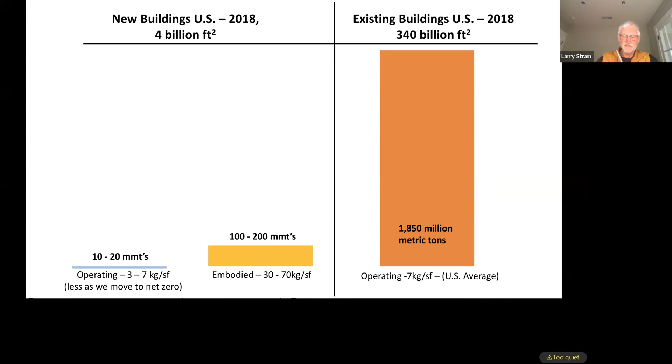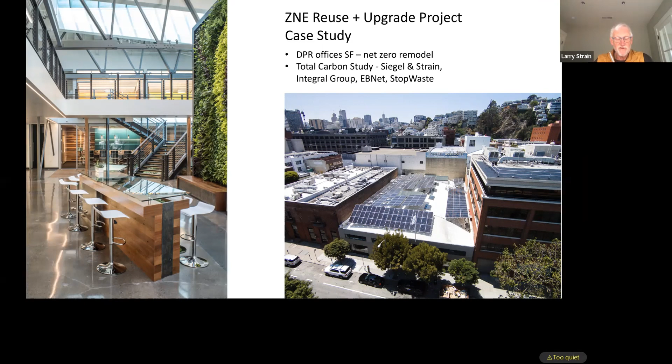I'm going to show you a little case study where we did a carbon study after it was done. We did a study of this building. We weren't the architects for this building. It's a net positive office renovation for DPR Construction in San Francisco, and it illustrates how important operational savings are, and embodied.

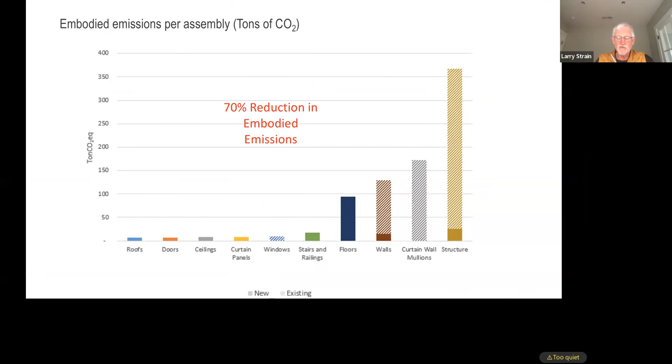The project resulted in about 70% less embodied emissions than a new building would have produced. Reused materials, shown hatched here, include the structure, the slab on grade, cast concrete exterior walls, and the historic aluminum curtain wall, windows, and mullions. So the solid bars are the new materials that went into the building, the hatched bars are what we saved. It's about a 70% reduction, which is pretty significant.

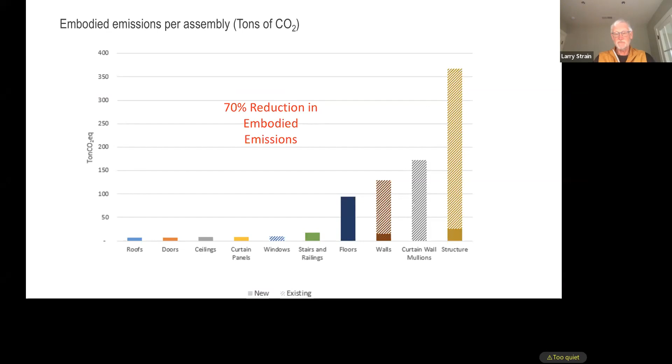But here's the deal: the embodied carbon compared to a new building was about 650 tons of savings, which was significant because it happened up front, when the project was first done.

But over the next 20 years, eliminating gas, adding efficiency upgrades and PVs will yield far greater savings than avoided embodied emissions. So you got to do it all. You got to do the embodied emissions, which saves emissions right up front, which is where we really need to save it. But then you have to keep the operating emissions down and get them to zero. This is actually a net positive building—it produces more energy than it uses, so it goes back to the grid.

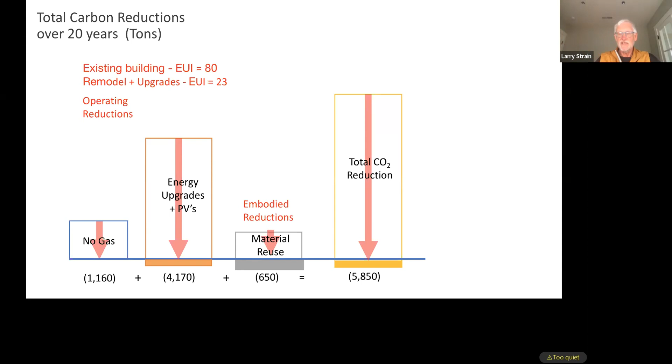But it's not easy to convince people to reuse buildings. Developers and architects like shiny new things, and we still need new buildings. There are also a whole lot of variables to consider. What if you can only improve the performance of an existing building by 50%, but you can replace it with a net zero building? How do climate zone, grid efficiency, and time affect those calculations?

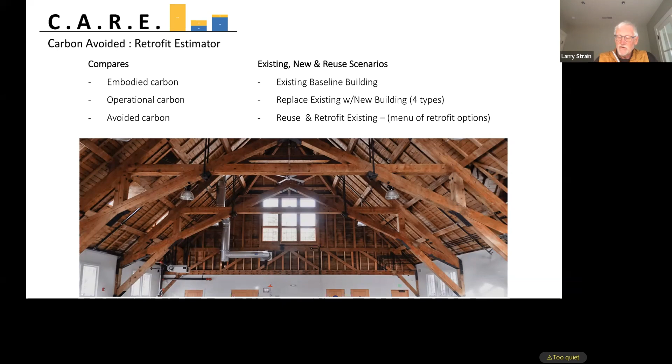We haven't had a simple tool that could compare all of those variables. I've been working with Erin McDade of Architecture 2030 and Lori Ferriss of Goody Clancy Architects in Boston to develop a tool that compares all of the carbon emissions—operating, embodied, and avoided—for different existing, new, and reuse scenarios. This is not a design tool. It's a tool for planners, building owners, and developers to understand the carbon impacts of their decisions and to evaluate whether to renovate, upgrade, or build a new building.

Here's how it works. You enter data about the existing building, including location, which automatically establishes your climate zone and grid efficiency. You define the type of replacement building you need and the type of upgrade it needs. You define the extent of the building retrofit. You set efficiency targets for the new and retrofit scenarios, and it gives you the embodied operating emissions for each option.

It was developed in Excel. We're currently converting it into an open access web-based app. We're also working on versions that will allow cities and developers to evaluate whole portfolios of buildings, because this isn't just about single buildings—it's about reusing and upgrading thousands and millions of buildings.

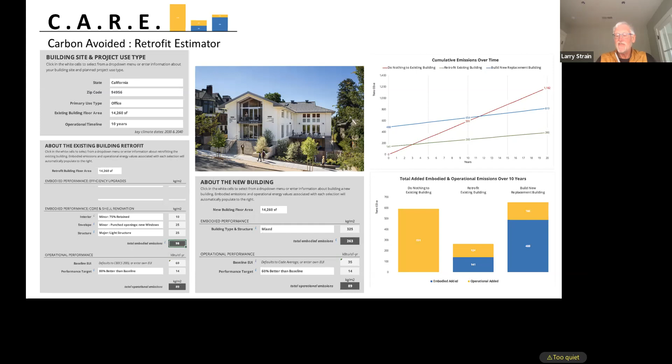There are a number of tools out there that can help you understand, track, and reduce embodied carbon. Databases give you carbon emissions per kilogram of material, so those are useful just to take a quick look at different materials. Carbon calculators track total embodied carbon emissions for buildings and building assemblies based on material quantities. There are a few more in the works, including the CARE tool I just showed you, an EPIC tool by EHDD Architects which is coming out soon, and Chris's tool, the BEAM calculator, which is the only one that currently tracks and calculates carbon storing materials. We're hoping to add those kinds of options into the CARE and EPIC tools as well, but they're not there yet.

So I'm going to go through my action plan, and if Chris isn't here, we can go back to that if we want, or we can just talk through it.

As you might expect, the top of my list is to care for and improve what we have, to reuse and upgrade existing buildings. Second on my list is what Chris is doing, which is to shift our material economy to carbon storing materials. More immediately, we need to use less concrete and build with low carbon concrete. We use more concrete than any other material in the world, and it accounts for over 8% of global emissions—just from concrete. So concrete, a lot of people are working on concrete.

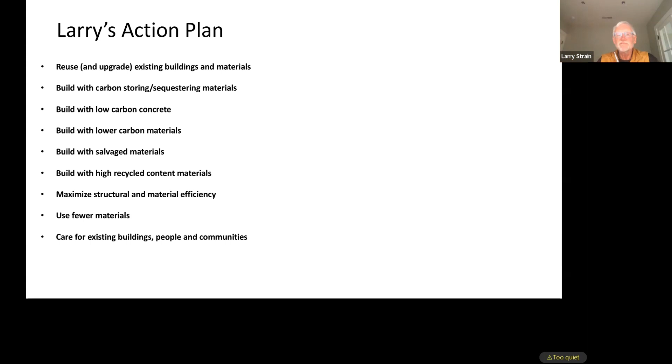I don't know, Ian? Not at the moment, not yet. We can either show this or go back and hear him talk about all these points, because he's got something to say about them. What do you want to do? We have time to go back, or should we just take questions for Larry while giving Chris a few minutes to sort through the technology? I can leave this up, and when Chris joins us, he can talk to his action plan and points, which overlap with some of the same things. He's got bigger picture things like changing the codes, which are really important.

So, Ian, do we take a show of hands, or how are we managing the questions? We can go through some of the ones in the chat that haven't been addressed yet, and then go by show of hands. Okay, let's see what we've got, here's one.

Michael asks: what's the current cost difference of building a carbon negative typical residential building compared to a conventional building? Are there projections on what this cost differential would be if materials are mass produced at high scale and practices were widespread? Chris really should answer this, but I can say that Chris is building his smaller scale buildings now at really no cost difference at all.

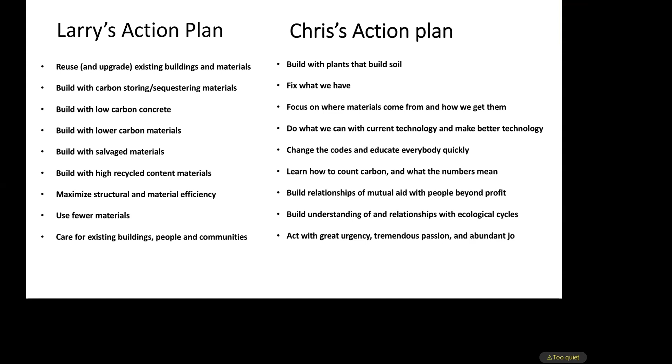Yeah, I totally agree with that too. In fact, I have a no news policy. Somehow the news finds its way to me anyway, but I don't want to read it, I don't want to hear it. Just keep me focused on solutions.

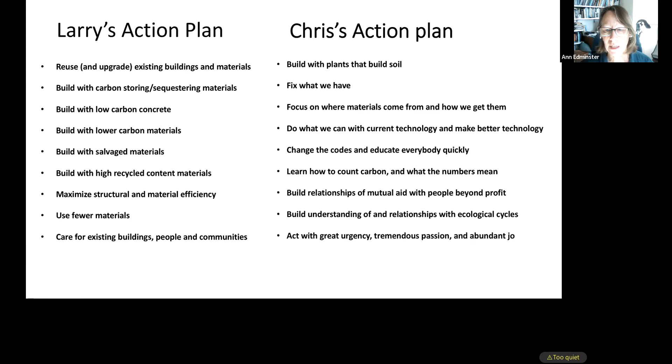So Chris, Michael asked: what's the current cost difference building a carbon negative typical residential building versus conventional? And are there projections on what the cost differential would be if the materials are mass produced at scale and the practices were widespread?

Well, the answer to the first one is relatively simple in that there are quite a few practitioners here in Canada, and I'm sure in the US, who are already doing residential buildings at carbon neutral or carbon storing at market rates right now. So there's not necessarily any cost difference.

What I found, I did a study for Natural Resources Canada, and we found no correlation between the carbon footprint of a material and its cost. Sometimes the material with the best carbon profile was the cheapest, sometimes the most expensive, sometimes mid-range, and vice versa. Sometimes the one with the highest carbon footprint was also the most expensive, or it could be the cheapest. It's not really an indicator. It's not one of those things where, because it's low carbon or carbon storing, it's therefore more expensive. It's kind of all over the map.